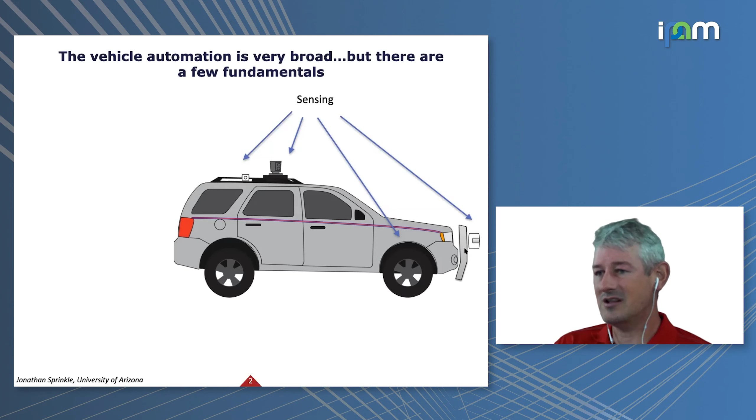In terms of a second kind of fundamental, we are talking about control in this talk, and there are lots of different things to consider when it comes to control. First is that you do have to ingest some of the sensor information. But the second is that control happens at many different layers. You might be controlling from the sense of giving high-level direction to a car for where it should go. You might be injecting a trajectory you'd like to follow. You might be giving advice on what the speed limit is. Or you might actually be sending voltage to a regulator somewhere on a vehicle. We handle that through layers of abstraction, and we'll talk about some of those layers throughout this talk.

And the third big piece is the communication piece. So we have layers to manage our control. We have layers to manage the sensing and how the sensing data are captured and, in some cases, forwarded on to other pieces of information.

This communication piece is necessary because of the way cars are built now, and also necessary for anyone who wants to do serious research on a car, as apart from building a car to sell. If you want to research a car, you'll want to show up with your laptop and plug it in to test something you tried before. If everything is on one computer with no communication except wires, you're looking at hours or days of delay to take a simulation, port it to the car's operating system, make sure you don't violate runtime or real-time guarantees, test it on the car, and then realize you had a negative sign error, so you need to go back and do it all again.

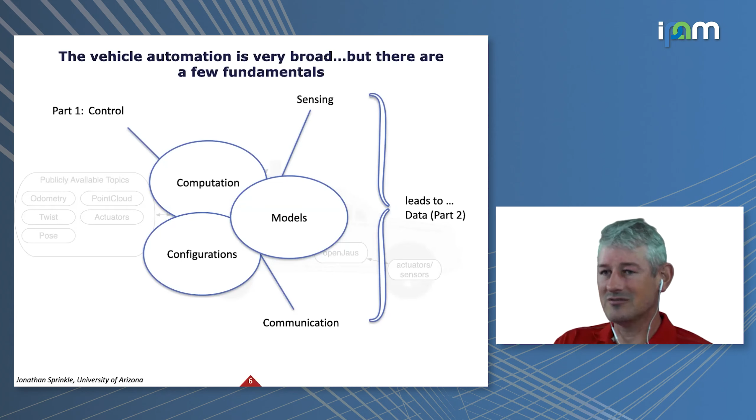What I'm hoping is that after we get through part one and part two, you'll have a sense of, if I want to do something, this is how I go about doing it. This should feed into interesting discussions in our office hours, as well as tutorial sessions in between tutorials and workshops where we can get some meaningful things done as a group.

As I mentioned before, it's kind of impossible to cover all vehicles out there. I'm going to primarily use the research test bed we've developed at the University of Arizona as an exemplar for what you might see.

I want to re-echo that the test bed we've built isn't indicative of anybody else's architecture or test beds, except for the fact that we still get data from the environment and still send messages to control our vehicle. Once you've got those two pieces down, you'll see why some of the architectures we have can be modified to work with other kinds of vehicles.

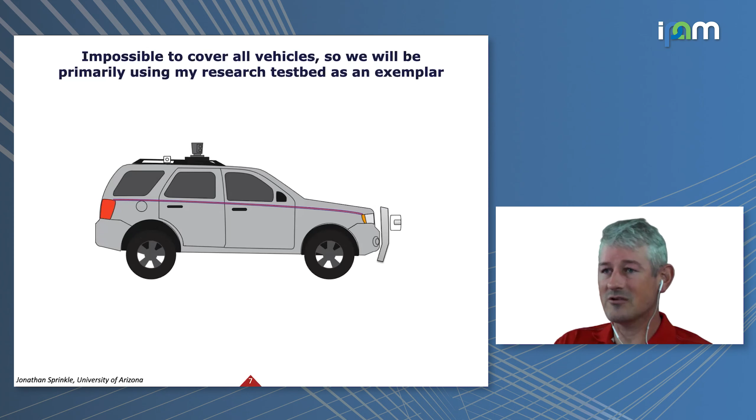As we go throughout the fall program, the test bed that we've developed here is an open source test bed, meaning you can download almost any program that we've run on it and run it on your own machine if you're willing to install some things on Linux and perhaps install your own Linux virtual machine. I think we're going to have some set aside groups for people who want to try some of the tests of stuff that we're going to do.

In the original plan, before the catastrophic events of the last 6 to 7 months, we had a plan to actually have the vehicle there in between pieces of the program so that people could do meaningful experiments or analyze data of specific things they wanted to see, or try out new kinds of controllers that they devised. We're going to work out some way for those who are interested to still do that. It would just be that me and my team will be Skyping with you while we do it in order to make it work.

But the important aspect of this is that you can test and validate stuff on your own machine and then show us the results of that, and have that outcome be something that we can then just download your code and run it on the car.

This has been a successful model that our team has used for about the last 7 years or so with summer undergraduate researchers, where in less than 10 weeks they've come up with something useful that they would like to do with the car, even at like a sophomore and junior level. It's a much smaller time scale if you're already familiar with things like MATLAB and control.

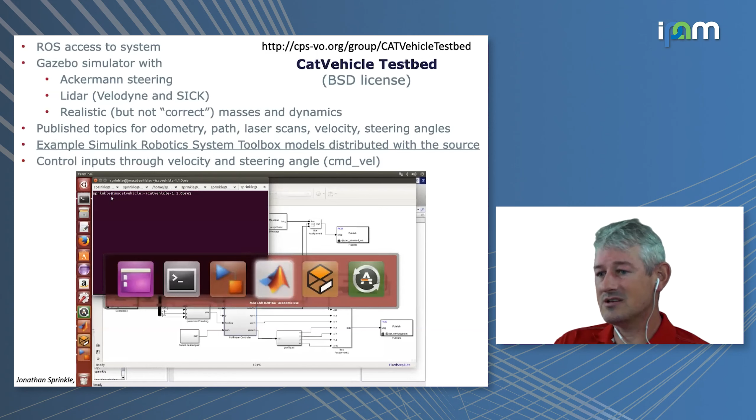The real advantage to doing this is that you don't have to be a coder expert in C or C++, which is the only language that we permit to run control commands on the car. But once you're able to develop something that is successful in MATLAB, you can take that MATLAB model and do something like this to have the car drive around.

We do have some safety things built into the car to try to prevent collision. In this case, you can see that an onboard system detected that there may be somebody living inside this structure, and probably we should stop driving before we collide with it.

If I really wanted to, I could wait a little bit longer in this video, and you would see that you could clearly resolve the situation just by picking up your car and moving it, except that you would then find the same obstacles. So what would you do if you were playing with this in your sandbox and you were a child? Clearly, you would just pick up the house and move it. Then once you've picked up the house, the car is going to be able to continue driving as long as there's nothing else in its way.

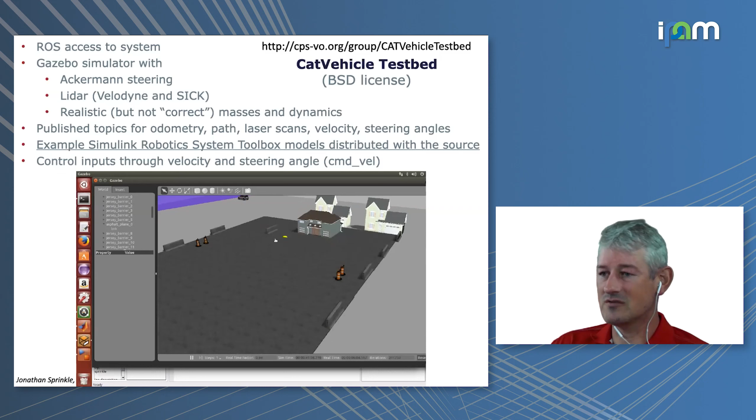So the goal of this is to talk about some of the challenges in actuation, which really involves safety and keeping in mind the safety of your system as you drive it along and do stuff with it. If you just go out and fiddle with it like you would a robot, you could do some really bad damage to yourself or to others. Part of what I'll be talking about today is the culture of safety that you have to have when you're testing with autonomous vehicles. That feeds into desires to have other pieces of your system providing some kinds of proof that they seem to be working.

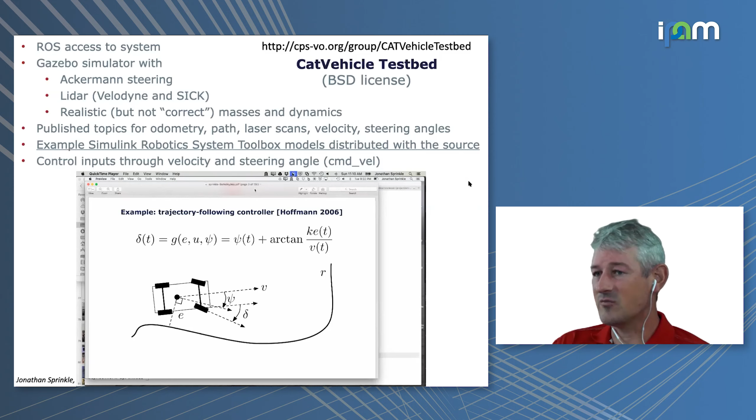The different layers that we have built in, and these are things you'll hear about more as we go through a tutorial on how you would control any kind of car, really reflect the kinds of data architectures that exist in vehicles today.

If you were to go into your vehicle and start looking under the dash, you would see wires everywhere. Even under your engine, you see wires everywhere coming out of the engine. I don't know any of you who might be gearheads like me. I used to have this car that was a 1970s Mercedes diesel vehicle. So there was one wire in the engine compartment, and that came from the battery to the starter. Everything after that, there was no wires.

There was no onboard vehicle management. There was no knowledge of the current state of the pistons. There was no memory that the valves were knocking because there was something wrong with the richness of the injection. There was no information about whether the water pump was on. There was no knowledge of really how fast each individual tire was going, because there was probably only a sensor on one wheel that ran a little spinner that came up and connected to the back of the dashboard, which made the odometer turn and then made the speedometer turn as well.

But cars today are very different. There's wires everywhere. Probably there's more than 100 electronic control units in a vehicle that you've driven, unless you're like me and you really love old cars.

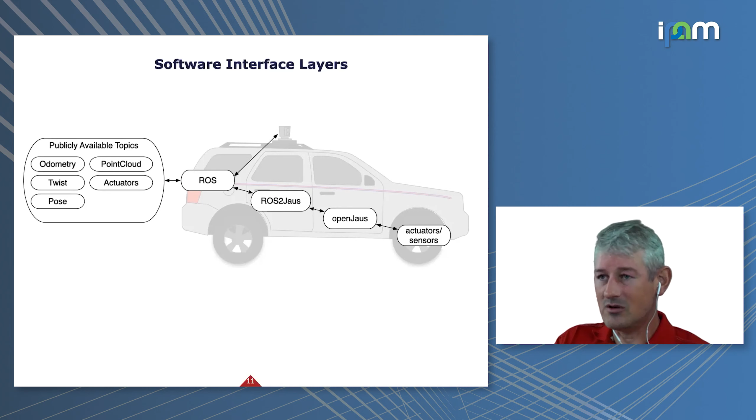Maybe only one or two more things before we start looking at some specific details instead of generalities. As we go through some of the remaining lecture today, you'll see that we do have some ways to visualize in 3 dimensions kind of what the car is doing. This is through a tool called Gazebo.

There's some active research right now determining whether we should allow Gazebo to actually simulate the kinematics and dynamics of our car, or whether we should simulate those in a separate process and just provide updated position information, which is some of the ongoing work of Rahul Bhadani, who's one of the long program participants as well.

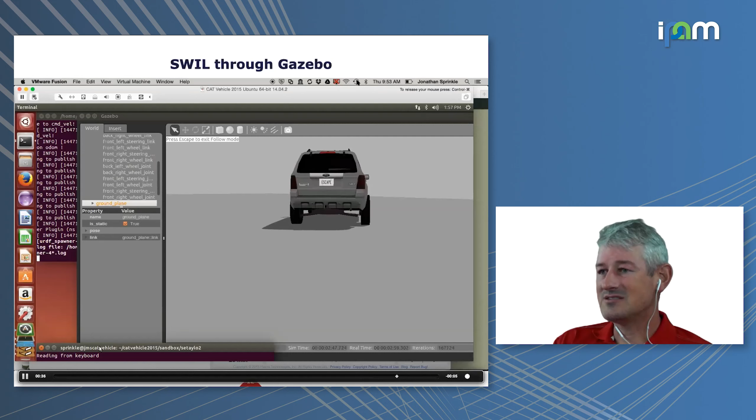So it seems great, right? It seems like this is super easy to do. All you have to do is inject a command and everything will be fine. This gets to why control of cyber physical systems is hard.

Even though we have data coming in, there are delays in that data. The sensing takes time to communicate. There's a fixed rate of communication for almost everything on a car. Instead of being data-driven, where something happens and I send an event, it's almost always time-triggered, meaning I'm sending information at 20 hertz, 5 hertz, or 0.2 hertz about the state of the environment or the vehicle. So you've got a worst case and best case estimate of when you might expect to see anything from any part of the system.

In addition to those sensing delays from the networking, you might also need to filter the data, which causes additional delay in understanding whether something interesting actually happened. Likewise, because we're talking about a physical system, you'll see delays in actuation and dynamics based on fundamental physics. You have to take those into account. I have two examples to remind us how hard that is when it comes to steering, which is one of the most difficult pieces.

So where do we correct these limitations? It comes from the software and algorithms we're using, at the highest level. That's kind of at the MATLAB level, if you want to think of it, where the implementation might be. We still need low-level information from data about the vehicle so we can know how it seems to be behaving and what its physical properties are. But we also want to know how we can correct for those, and that's where we rely on knowledge from control theory and control systems.

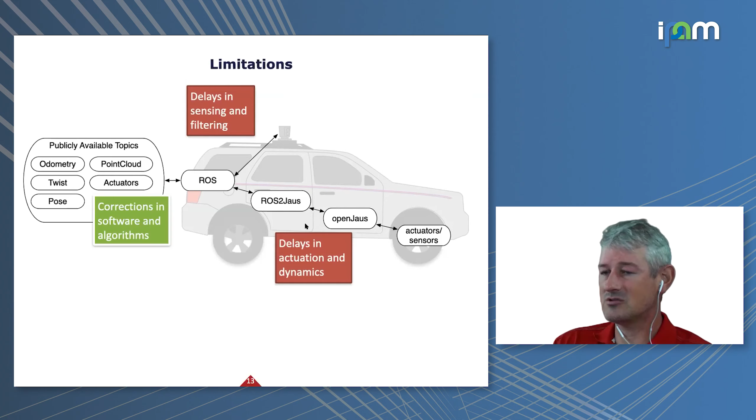So I want to start with a surrogate. Instead of talking about a car now, I want to talk about what's known as the Turtlebot. I'm going to pull up a quick example here, which may work. We were testing earlier to see how these things went.

If you're really good at cybersecurity, you could probably have figured out my password just from listening to my keys click, which is why I switched to a phone so it would be harder to hear the high frequency noise. Okay, so I'm going to type a few things here.

One of them is that I'm going to start up something called ROS Core. I'm killing it now so that I'm running the right one. The second is that I'm going to rosrun turtlesim turtlesim_node. This is going to give me something that is not a car. I don't know if you can see, it's kind of small, but I have a little turtle here.

The next thing I'm going to do is make that turtle move around, using ROS run turtle sim teleoperation key. As I press the right arrow button, I can see the turtle moves. If I press the left arrow button, the turtle moves left. If I push forward, the turtle moves here. I can interrupt as time goes on to make it show something. That's almost a J, right? Okay, so I've spelled the first initial of my name with a turtle. It's kind of hard, having to push buttons and make things happen.

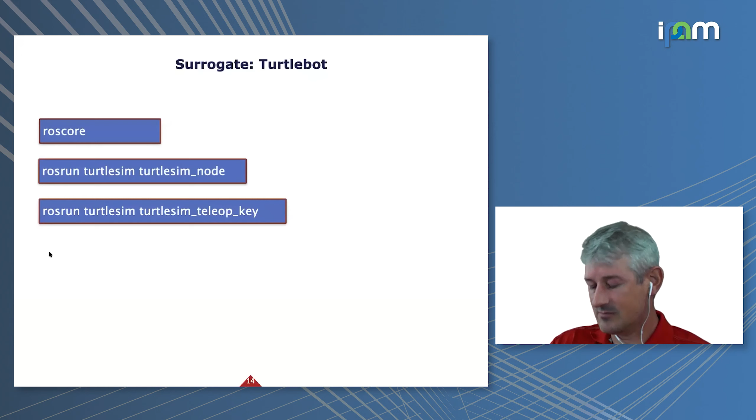Well, it was interesting because if we look at some of those outcomes, and I'm going to skip the next slide since it was the backup in case Unix didn't work. How does the turtle help us with the car? It helps because if we look at exactly what the CAT Vehicle is doing, we've designed it so that we're using the same kinds of messages. So if you can make something work for a turtle, it might work on a vehicle if you don't want to install all the crazy infrastructure.

So going back now to Unix to look again, or to Linux I should say, Ubuntu. Now I'm going to close a couple of these things.

So here I'm going to launch our vehicle, and I've created an environment that the vehicle can operate in, which looks a little bit like a neighborhood. It's very similar to the video example that we saw before.

And as this flies up, you actually don't see anything, because we have the ability to run it without visualizing what's happening. So as expected, something here actually seems to be broken. We'll see—whenever you see red text, it usually means that something not great is happening.

But I'm going to look now at the client that shows us what's actually happening in the 3D environment, and hopefully we'll be able to see that our car pops up.

Some of these red things are red things that pop up every time, and some of them are actually not a big deal.

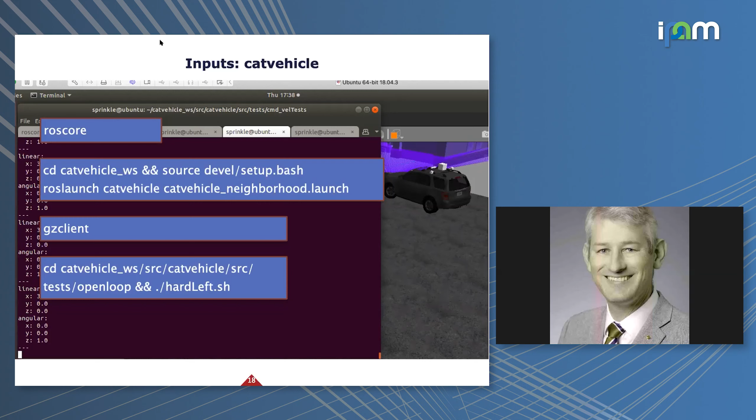So moving on to the next slide, what we're sending to the vehicle breaks down into two kinds of commands. You can send your desired velocity, using meters per second, and you can also send the desired steering angle, given in radians.

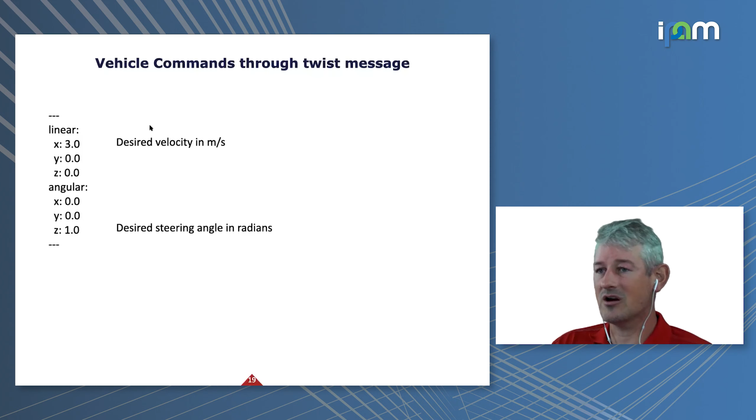These are kind of like the two commandments of vehicle control. There's all the other stuff you can see, like turning your blinkers on, opening or closing the door - all kinds of actuation that are the creature comforts of driving a car. But really it boils down to moving forward and how fast, and turning my tires and how fast. That's really where it all boils down to.

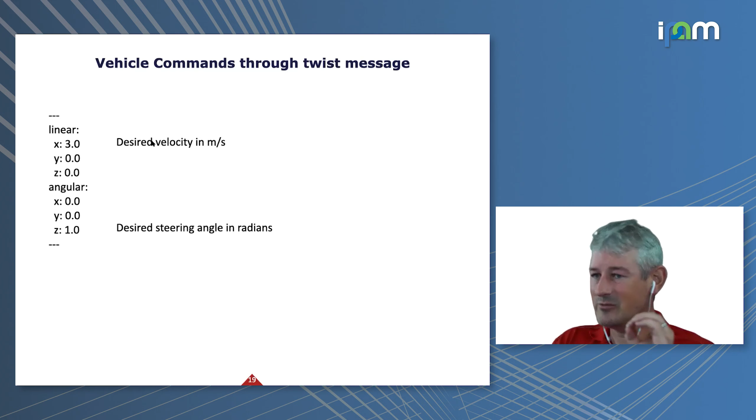And even if you restrict it to just those two things, there can still be challenges. So to address those challenges and other things with safety, almost everything that gets done requires you to do some analysis first to make sure that it's going to be safe.

This is more just for information later. If anybody is interested in developing their own controllers, they can refer back to this slide, which talks about the V architecture we use to first prototype things on paper, then put them into a simulator. If it works in the simulator, port it and run it with software in the loop. If that works, we inject data that have come from the real car. And if that works after injecting from the real car, then we're ready to talk about actually running it on the real vehicle.

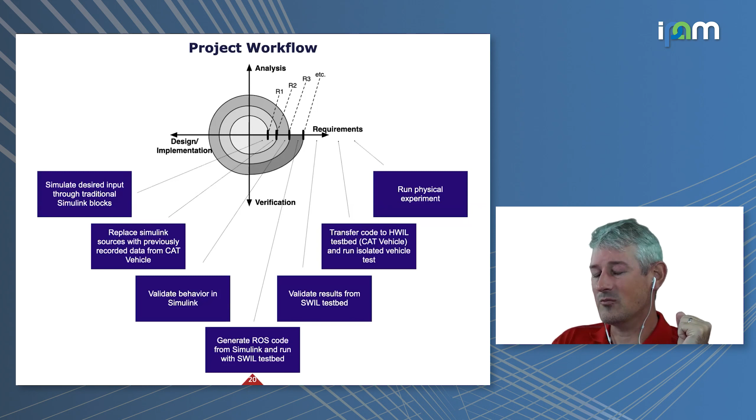So even though there are 7 steps to this, we've had plenty of examples where we've developed a model and run it on the car at high speed in less than, say, 2 hours. So you're talking about being able to take advantage of model-based design in such a way that you can rapidly turn the crank in terms of making changes to a system and affecting those changes.

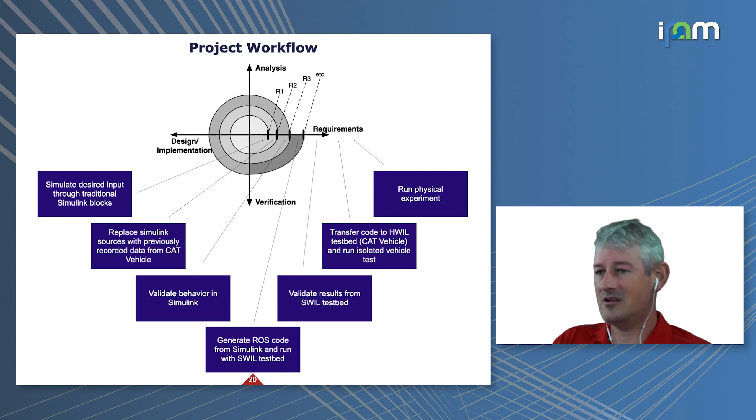So that was kind of a large overview of what some of the challenges can be and what some of the inputs might be. I want to next cover some of the basics of those two pieces of control, which boils down to sending the steering commands and the velocity commands.

Even though there are lots of different flavors of what you might expect for any vehicle, these are the kinds of inputs you may expect on a car you might have access to if you want to send control commands. You might send information about the angle of the accelerator you'd like to see. Those accelerator angles are typically given as a percentage, so you can say I want the accelerator to be 50% depressed instead of an actual angle of 0.2 radians, because you don't know what the max and min of any particular accelerator might be.

You might also want to change the accelerator angle to just be 80% of what it is right now, or reduced by 0.2 of what it is right now. The angle of the brake and the brake change in angle work very similar to the accelerator - you may want to set a specific value, or just increase it by 10%. You can also set a desired velocity and a desired acceleration.

So these two kinds of controllers are supervisory controllers that set the brake angle and accelerator angle on your behalf in order to achieve the desired velocity according to someone else's cost function. Sending the accelerator angle and brake angle are like the lowest level kinds of control - in robotics they're often called the wrench command. So you're actually setting a specific voltage or torque on something in order to make that happen.

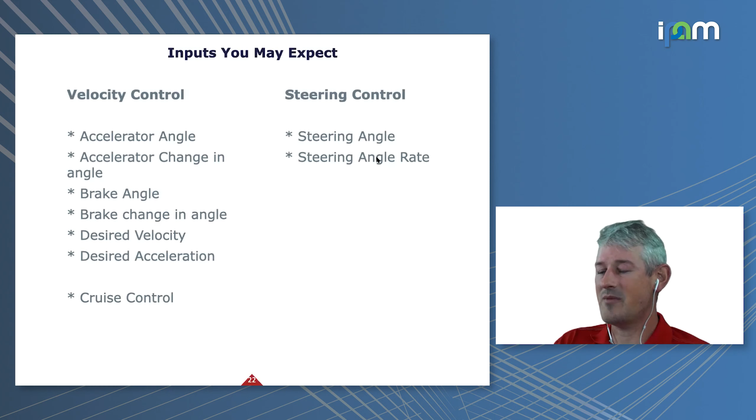Here's an example control layer that's based on some papers that came out of the DARPA Urban Challenge about 12, 13 years ago, where almost all the vehicles that were implemented there had something that looked like this.

On the leftmost side, you had something that was calculating the trajectory that you'd like to follow. In order to follow that trajectory, clearly you had to know something about the localization of your vehicle and where it is, where it needs to go. It comes from the trajectory planner, as well as the state estimation that comes to be approximating what's my current velocity, where am I within the locale that I think I'm in, what are the relative velocities of other vehicles around me, for example. And in between the trajectory planner and localization, you have the steering controller that's deciding that you'd like to turn your steering wheel left or right.

But in this case, the trajectory planner is determining your goal velocity or relative change of velocity and providing that to some vehicle interface. So right away, we've gone from, we don't just have high-level commands and low-level implementation. We've got high-level commands which have intermediate components, and those intermediate components feed into the lowest level control.

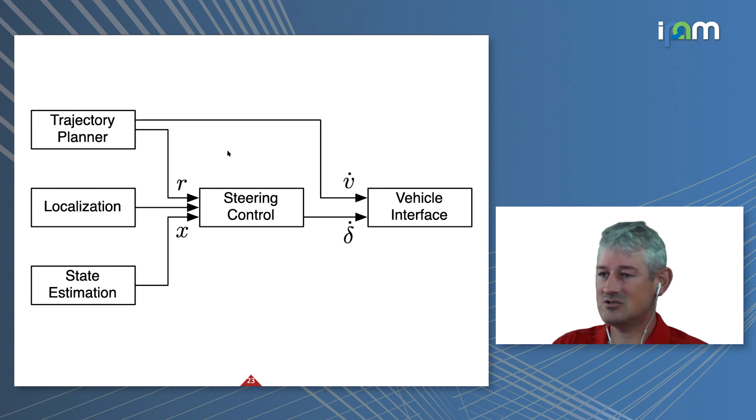This is an architecture that we'll see over and over for control mechanisms, because it allows you to put something in between two other things and intercept messages that are coming from one and pass along your own version of that message in order to affect the control that you'd like to have.

This is very common for other kinds of robotics applications and really derives from component-based design from simulation, where you might see discrete event simulation, DEVs as it's called, where you can simulate things at faster than real time by determining who should receive a message at what time and what that message value will be. And you can kind of sleep until you get a new message. So this is based on some longer term architectures from back in the 80s and 90s as well.

So in terms of steering angle and steering rates, I'm going to go back and see whether my computer ever came to life here in Ubuntu. I don't think it did, but if it did, I would be able to show you another example of these limitations, because if you want to set the steering angle of a particular vehicle, you have to understand that there's dynamics that belong to that.

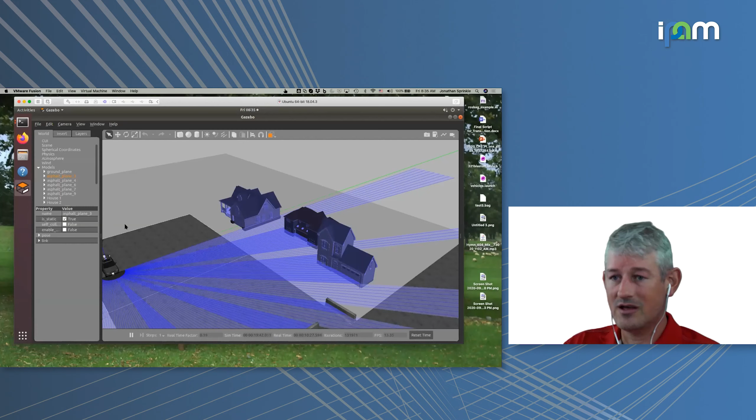Okay, so we did finally get something that came up here. I'm going to scoot over just a little bit, and I'm going to zoom in here so that we can see what's going on.

Jonathan, we do have a question from Lawrence. I'm going to unmute him. Please do, yeah.

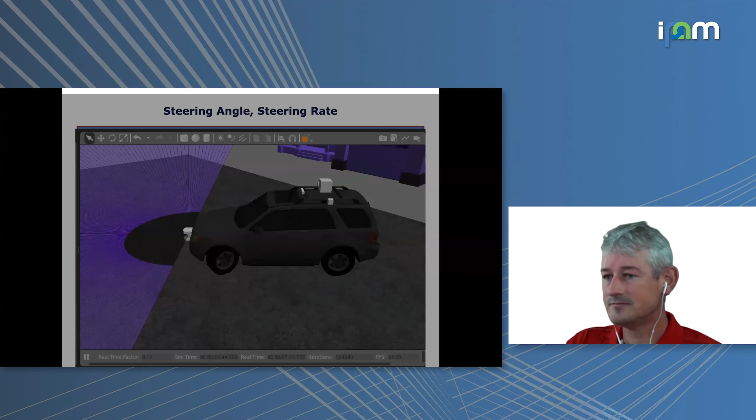I was still looking at the previous slide. I was wondering if you could say a little bit more about the delta variable. Yeah, I'm naming that delta variable as the tire angle. I have actually some kinematic and dynamical equations a little bit later that make that a little more clear — I totally glossed over that. But that's the output of the steering control. So in this case, the steering controller isn't changing your velocity, it's just setting the tire angle that you should follow. It's depending on the trajectory planner to set a valid velocity. All right, thank you, it's a great question.

I hope everybody can see it, but I'm going to zoom in even more until the front tire is totally in the frame here. And I'm going to pop over to pull up an example of what we were doing before.

In this case, we were looking at the command velocity from the turtle. I'm going to use the same commands we were using for teleoperating the turtle. So ROS run, turtle sim, turtle teleop key. But instead of turtle one command vel, I want that mapped to cat vehicle command. And now if I press the left button, we should see the tires move.

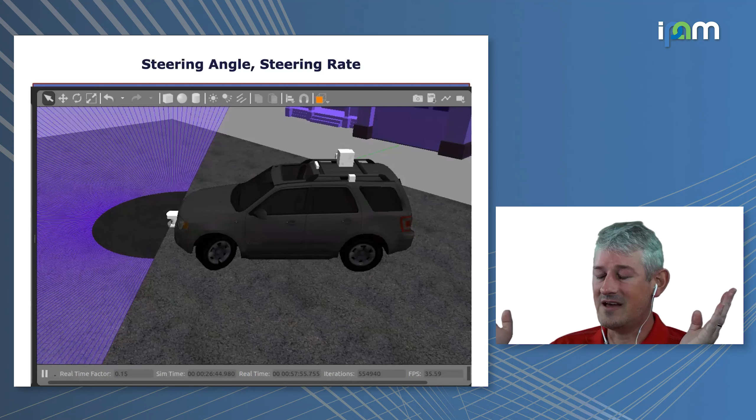But it's something you have to consider as you're doing your controller. You have to understand that if I'm setting a steering angle, it actually takes a little time to get there. And that's something that's often neglected in simulation, especially vehicle simulation.

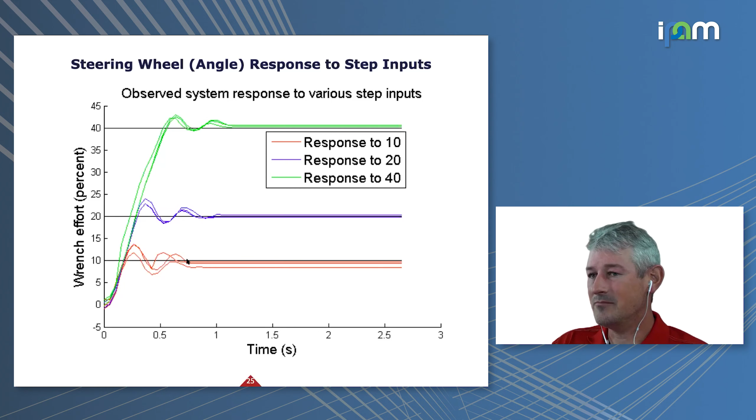Another thing often neglected with dynamically interesting vehicles is that you have to consider the vagaries of the overall topology through something called the Ackermann model. Almost nobody really needs to know about the Ackermann model, I'll be honest with you. To drive a car, you don't need to know it. But if you want to simulate a car, you kind of do.

We're going to try one more time to see whether I can make something interesting work here, and then this may be the last time I try something fancy. The Ackermann model is one where the basics of it were developed, I think, as rack and pinion back in the 1790s or 1820s or something like that. It's actually kind of an old system for why it works.

I'm going to walk you through, and I hope everybody can see this now, some drawings of how this works. It's animated a little bit to show you what some of the challenges are. So if you begin with your vehicle and what your vehicle is doing... oh, I see we have another question here.

Jonathan, we got another question.

Since your sensor is on a different computer and you use ROS to send commands to the car, there's quite a latency between what you observe and when you execute it, even before the wheel starts turning. Doesn't that introduce instability in your control if you want to do obstacle avoidance or something like this with your car?

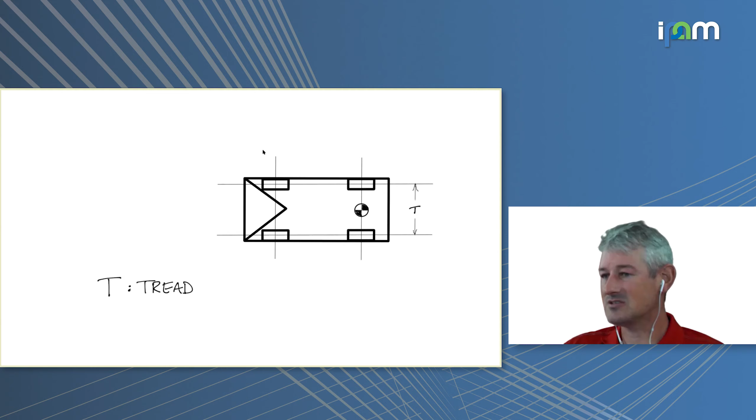So we're going to put some tires on this car, 20 R45 72s or some other number I don't really understand about tires. Each of those tires has its own dynamics and its own path. I have a tread width for my vehicle, and also the wheelbase, L, which controls how far apart the tires are. There's the longitudinal distance L and the lateral distance T that govern the equations of motion for our car.

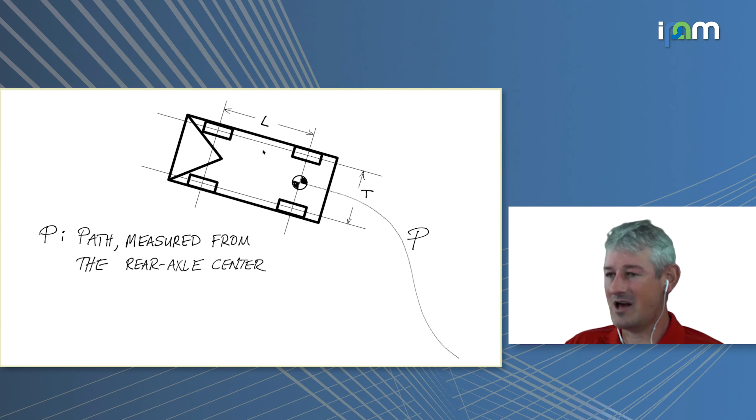If our car looks something like this and we want to follow a path, it's not as easy as just moving left and right, because the car has its own dynamics. We typically measure the path as following over its center of motion, the center of the rear axle. Unless you're doing high-speed driving in top gear, the path of your car is always going to be right over that rear center axle. So we pretend there's an imaginary middle tire governing what the vehicle is doing.

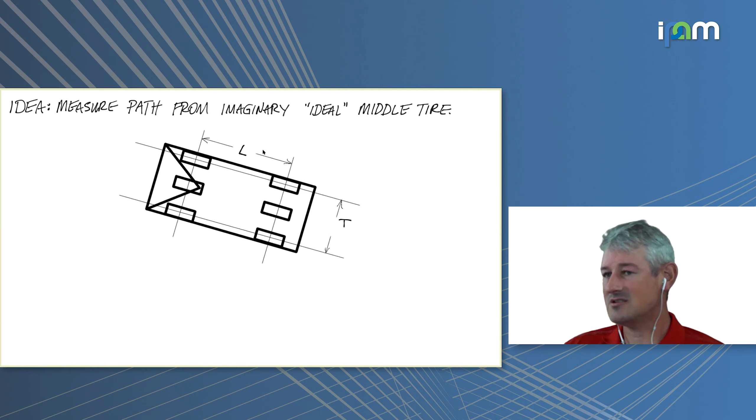This is what's called the bicycle model of control. If you use the bicycle model, you assume you're just setting an idealized tire angle, depending on the dynamics of the car and its physical properties, with the rack and pinion setting the individual tire angles so you don't end up tearing up your car. As we follow this path with this model, it's straightforward when going straight, since all the lines match up for every tire. But as soon as we start to turn, it fails really badly.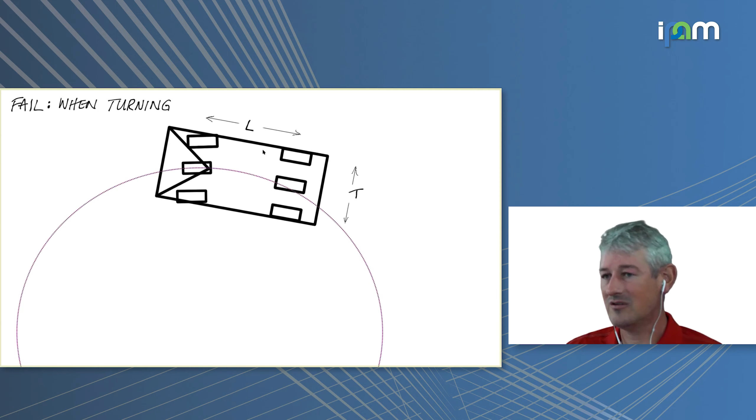If I take each of these angles and draw the circle of the path I'm trying to follow, the tire I'm following, if tangent to that curve, would go here. But if we do that for the inner tire and the outer tire and compare the paths, at some point over here on the left, you see that the tires actually cross over, and they cross over again over here.

So if you wanted to build a simulator, which many folks have tried to do in the past, to simulate what your vehicle is doing, and you forget to take into account some of these kinds of things, your simulator will actually throw your car into a thousand pieces, as long as you have little bits holding the tires together or pieces holding your chassis on.

We did some preliminary tests with the CAT vehicle when we were just using an existing controller that was on a unicycle robot. We just gave it a wheelbase and told it to take off, and one of the tires flew off. I was like, that was weird. Let's try that again, maybe I just didn't make the stiffness hard enough. But no, it just really doesn't work.

You have to choose this ideal tire angle based on the wheelbase and the tread width that you have, so that you can change it, and this is what Ackerman's model does. You have a line that goes through your rear tires, and a line that goes through your idealized front tire. With this, you can come up with an idealized path that your car will follow, which is not exactly the front tire's angle. The front tire will actually follow this path, just outside the lead path. Likewise, the inner tire and the outer tire will follow their own paths as well. Once you use Ackerman's model, it allows all the tires to move on their own and prevents this unnecessary tread wear.

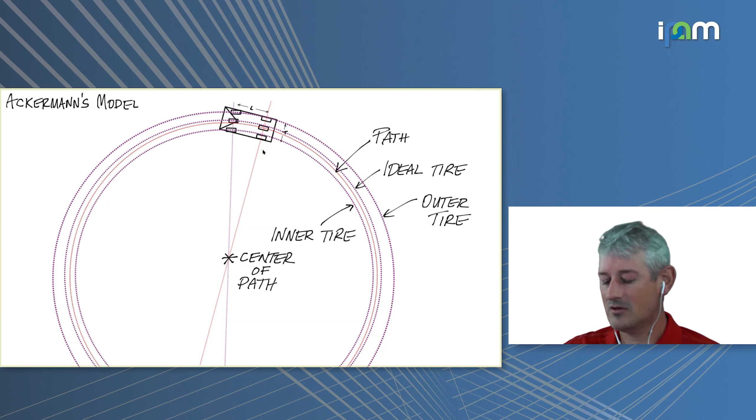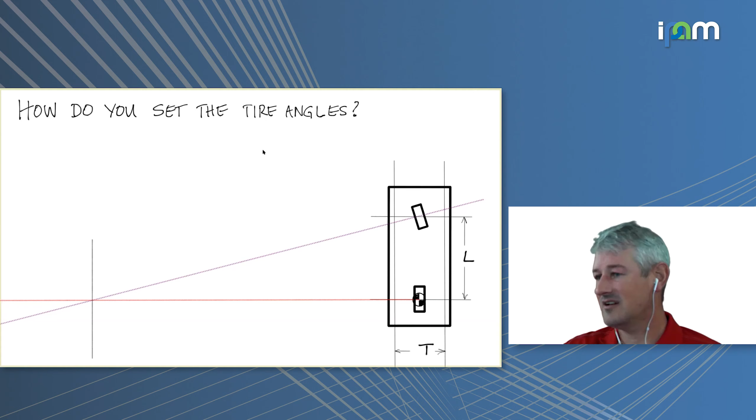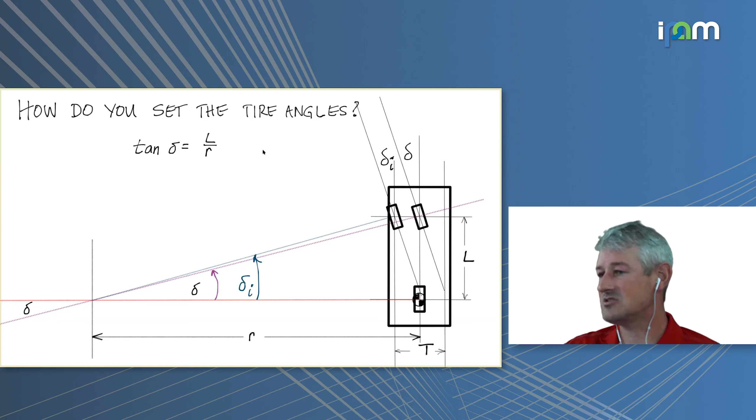So to summarize, what do you see and how do you control with these tire angles? You have a bunch of different equations that can help you get the idealized turning path you'd like. Whenever you want to set a desired path, you're setting your turning angle based on trying to follow that path, based on the radius of your path. So you set an idealized tire angle based on the radius of the path you want to follow, and from that idealized tire angle, you can approximate the tire angles of the other tires just based on trigonometry.

So you have an inner radius and an outer radius that you can ascribe to this. You need those inner and outer radii to make sure you can avoid an obstacle on your inner path and avoid an obstacle on your outer path. So even though this seems like just a simulation detail or construction detail, unless you're considering these things in your validation criteria, it's really tricky to do.

But again, once you've got a radius of curvature, little r, from that radius of curvature you can come up with, based on your wheelbase, the idealized tire angle by just taking the inverse tangent of L over R. That's going to give you the tire angle you should set based on the radius you'd like to achieve.

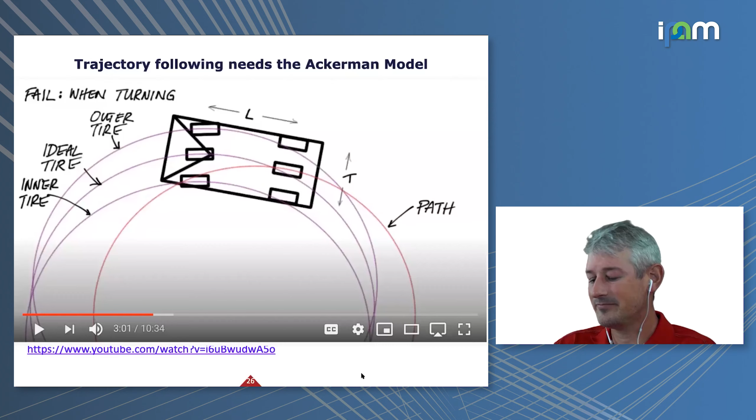And so this was my backup in case that didn't work. We're just going to skip all of this now.

So here's a great example of how to come up with what you want that steering angle to be for something you want to do based on the instantaneous path data. In this case, I'm not determining that I want to follow a particular curvature as much as that for my car, I'm not on the path right now. So I can estimate my error to the path, E here. And with my error to the path, I can also get an instantaneous value of my angle. So my angle at T is with respect to where the path is normal, and my psi is telling me the angle that I have to the instantaneous curvature of the path here. So based on my error, the instantaneous path error, and my current velocity, I'm going to use this equation to determine what I'd like for my tire angle to be.

And maybe there was another question, I thought I saw the chat light up a second there. There is - the question is about, in a modern car, whether the individual tire angles are controllable or is it mechanically enforced to be correct relative to each other?

For some vehicles, it can be mechanically controllable for each individual tire, especially if you've got a four-wheel drive car or a hypercar. Those are ones where the individual wheel speeds can be controlled, and they're often used to reduce tire wear. But largely what happens is that somewhere there's an onboard component doing some lookup table analysis to say, at this speed, with this tire angle, this is how I need to move all the other individual tires. There's an onboard computer doing that, and they kind of don't trust us to do that ourselves. We would probably need to hook in and connect voltages to each of the individual tires to make that happen.

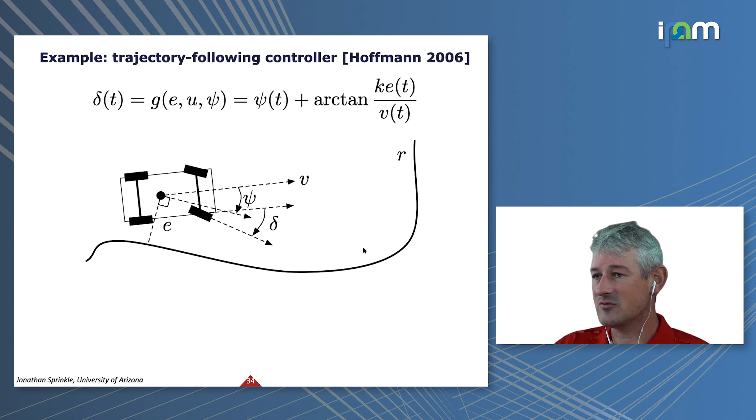But the pesky element here is this velocity of T. I'm depending on somebody to give me a reference velocity that's valid for a specific curvature, which is not always useful. With, I hope, a little bit of forgiveness from anybody on here who may have been part of this team, there are previous examples of what can happen if you give a turning angle and don't think much about what the reference velocity should be. You might end up saying, is my camera upside down or is the car upside down? So you have to be really careful when sending these commands to a vehicle to make sure it behaves like we think it should.

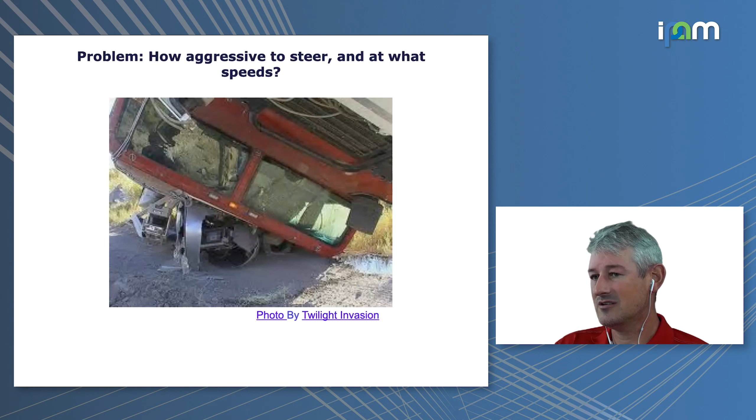So in order to accommodate this, one thing you may consider is coming up with controllers that will fix the velocity. If you provide an input velocity that's either flat out wrong or too aggressive, you'd fit that to a particular driving profile. I'm treading a little close to the data topic we'll talk about more on Monday, but if you had information from a driver about how they typically drive, and you recorded the steering angle percentage compared to the velocity they're driving at, there's actually a pretty well-defined curve that falls off pretty hard as you get to higher speeds. It turns out we almost never have high steering angle at high velocity.

We can develop some controllers, and this isn't necessarily about understanding all the vagaries and mathematics behind it, as much as knowing you can create this controller and put it in the car, and it will handle setting the velocity for you if you provide the wrong velocity. It will regulate your velocity based on the steering angle it can achieve right now, based on your definition for what safe means.

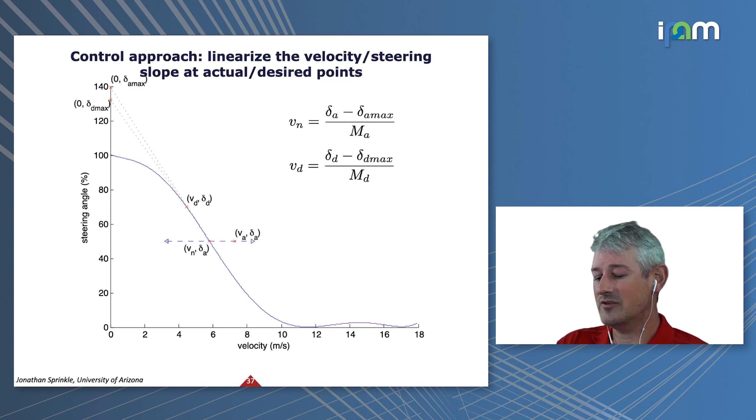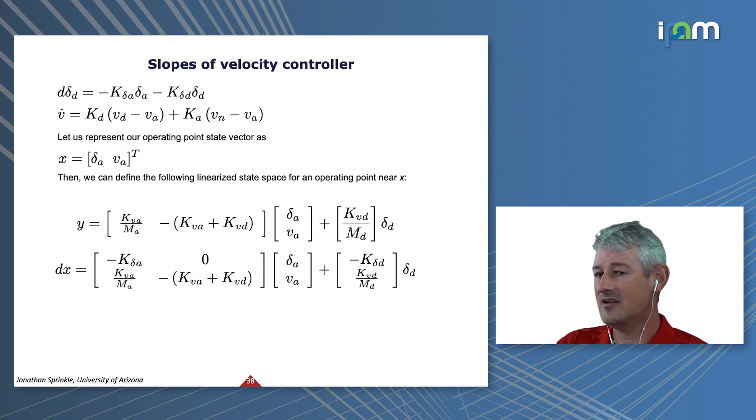Going back to the comments on what it means that we can control individual wheel angles, there are lots of controllers like this that translate instantaneous velocity and desired steering angle into actual steering angle and velocity for individual wheels. So you can do fairly straightforward control here to determine how this velocity controller achieves the actual velocity, so that if we start outside the safe space, we can get back into the safe state space as quickly as possible. This kind of implementation allows us to make that happen.

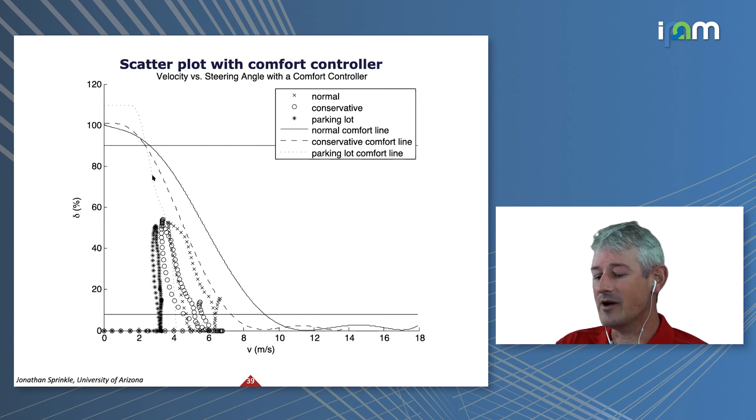We can even define a couple of different driving profiles depending on what we want to follow. Here's a normal comfort line. Here's one that's really comfortable. And this dotted line here is me driving in a parking lot, or you may want to consider it as my grandmother driving around. Every person has kind of their own individual curve that they follow.

So why did I go through that example? You'll remember that in the beginning we talked about having the steering controller that's in between your trajectory planner and the vehicle interface. This adds another layer, which we call the comfort controller or safety controller, however you want to think of it. That safety controller allows you to command exact values for rate of change of steering, but it regulates your velocity, preventing you from sending a velocity that's too high because that would result in catastrophic failure or unsafe behavior.

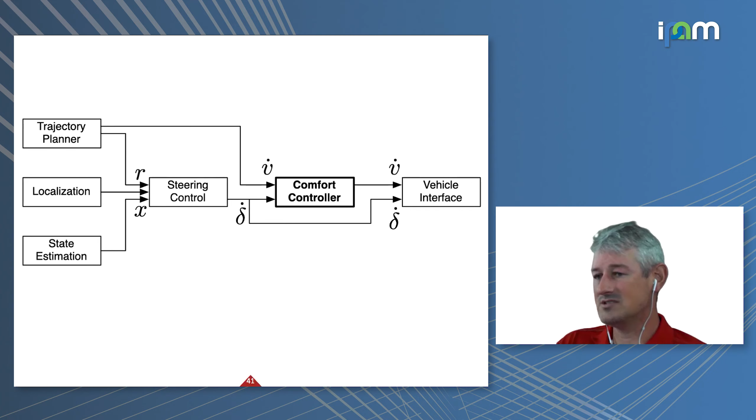This is indicative of the kinds of control architectures you see, and why we depend so much on things like the Robot Operating System to do this, because we can hook the boxes up in a certain order and have individual components tested on input and output data streams so we can validate they're working. This is essentially the state of the art for producing low-level behaviors on existing vehicles today: individual components are spec'd, their input-output definitions given, and once they pass validation and requirements testing from whoever purchased them—if it's Toyota, they might purchase from Denso; if it's Dodge, they may purchase from Mopar or another supplier developing those low-level controllers—once it passes that, they feel comfortable plugging it into their car and making it work.

I want to spend a few minutes talking about some of the actual limitations we have in vehicle control. These are largely based on physics, but also get into some challenges—one of the questions, I think Darius mentioned, about the delay you might see just from being hooked up in a network. Our vehicle came with a stock cruise controller that was a predictive receding horizon controller that would try to match input velocities as they came in.

You could provide a series of velocities you'd like to follow over the next, say, 10 seconds, and it provided an optimal controller that would try to match those velocities as best it could. So if you know your velocity for the next 10 seconds, it's a great controller. For a cruise control example, we start at time 0. At around time 6, we provide a reference velocity that goes up, and then we stay at that velocity of about 8 meters per second.

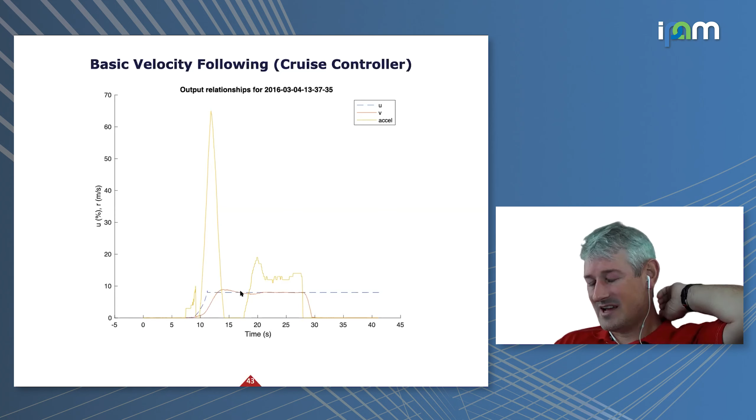As we start to drive, you see we track that velocity, and at around 12, 13, 16 seconds, we get to steady state. So 16 seconds to get to 8 meters per second is not particularly aggressive—you would probably be asking why we were going so slow, or if we were still in the drive-through if somebody was driving that slowly. But let's just say, for example, that's kind of what we've got right now. That's our cruise controller input.

So you provide a reference velocity, and the vehicle provides accelerator and brake angles in order to make that happen.

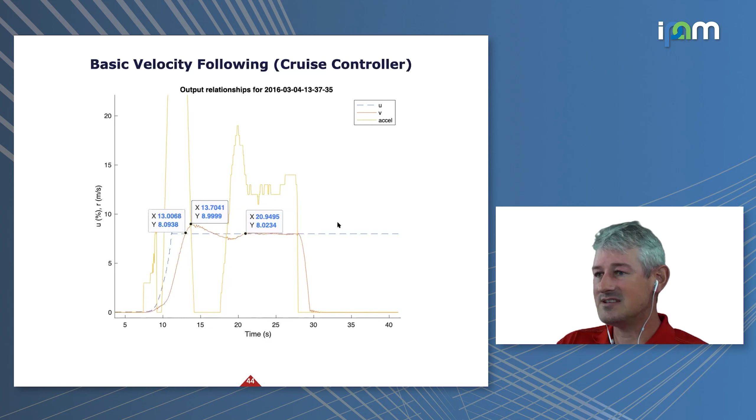Now if you zoom in on this, you can see the steady state value was around 20 seconds. I only thought it was steady state at 16 seconds, but we actually dipped down below there. Once you get into steady state, it maintains pretty well. But if you provide any input other than a constant reference, you can end up with behavior that's not as good as you thought.

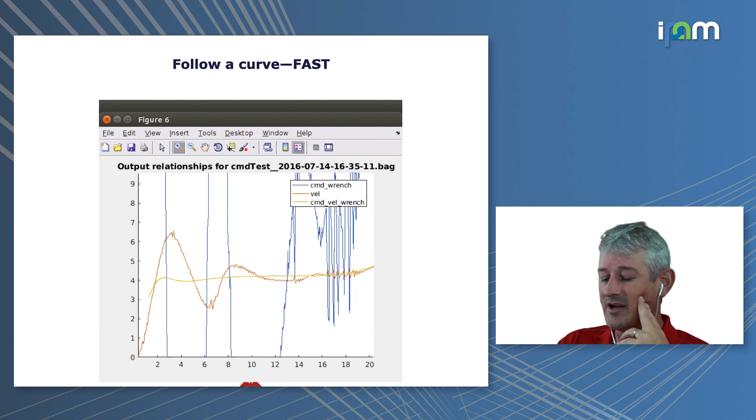If you wanted to do something like hypothetically control traffic flow, something interesting like dampening traffic flow with your car, and you were to use this, you'd be coming to a stop in the middle of the lane. So it's really kind of unacceptable.

This was not a great outcome, right? We needed to correct this. Jonathan, so this gets back now - we have another question. Pardon me? Oh yeah, go ahead.

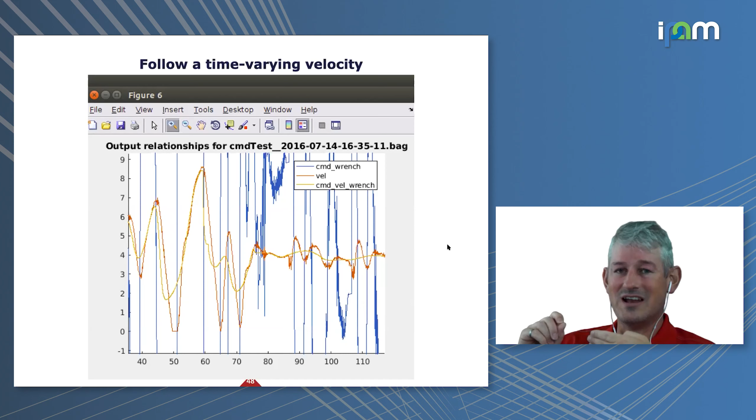And many of the more interesting controllers are ones where we're reacting to the vehicle ahead of us, and the vehicle dynamics ahead of us dictate how we need to react. Okay, I see. Thank you.

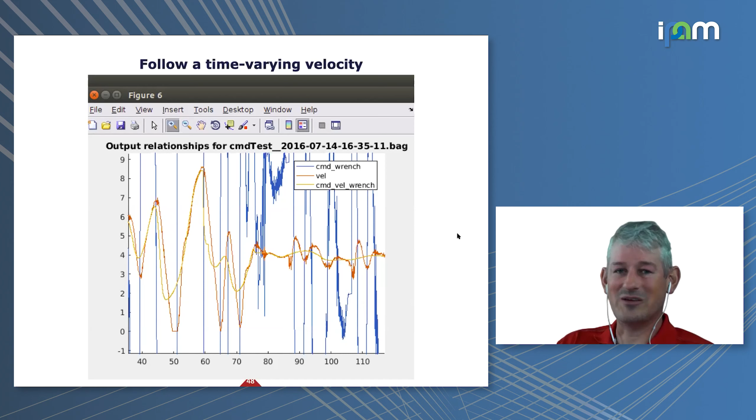But it took us a long time to figure this out too, because we thought, it's a predictive controller, how bad can a predictive controller be? Well, it turns out if you change your input a lot, predictive controllers are pretty terrible. And again, it's not that they're bad, they're just not designed to do that, so we shouldn't fault them for that.

Going back to the software interface layers we talked about earlier, because we're using lots of different layers to make this happen, we can inject new kinds of control at different places so we can take advantage of developing a little bit of new technology in order to make this happen, and just put it in at the right place. So with apologies to those of you who have Clippy as your favorite, that's what we're trying to do.

We're trying to build a model and analyze that model. Once we're happy with the analysis, we want to generate the code and then have it work.

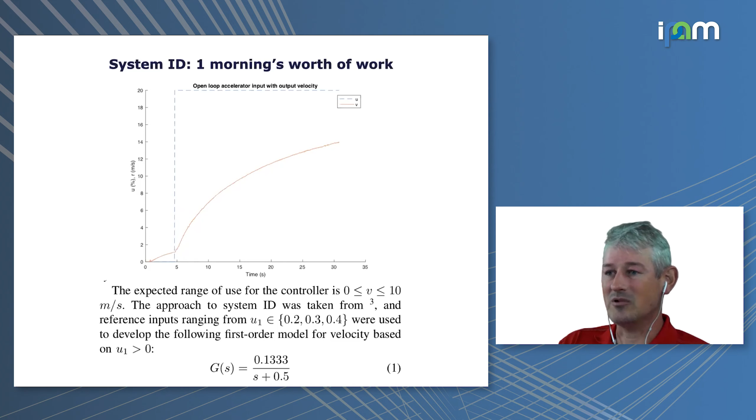I may be able to talk a little more about this on the data access side. We're treading into data territory again. But this is an example of where if you take a system and do a little bit of system ID, then you can build a model with that system ID within a tool suite.

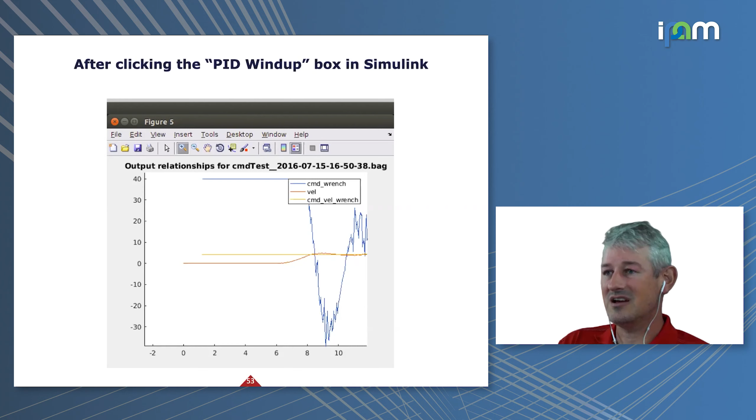Once you're happy with how your system behaves there, you can take the inputs you got from the real system and see how it tracks. So now we can actually simulate that using our Gazebo simulation to make sure we're not going to send some commands that are weird. In this case, we actually track pretty well with what we're expecting.

And then we go out and track it with just a cruise controller. We see that it's behaving pretty well with the cruise pole at 3 meters a second. Now when we try to follow this representative curve, you can see that we're actually tracking it much better. We're still overshooting a little bit, undershooting you might think here when braking.

That's a safety design decision. We're braking a little more than we thought we needed to because we're better off braking a little more than accelerating a little more. But we're no longer coming to a stop when we get to this curve. We're dropping down to, say, 1.5 meters per second.

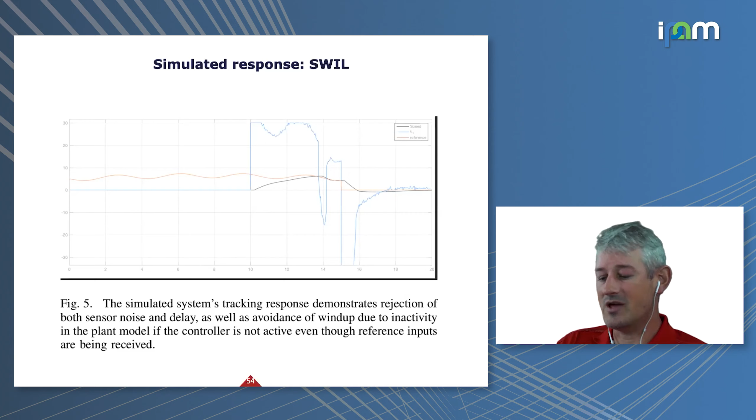This is a zoom up of that. We're dropping down to a little bit lower than we want, but we're not actually resulting in coming to a stop. So these kinds of low-speed tests work really well because we did a lot of linearization to make that happen. At high speed, the models we need to work with are much higher risk, so we have to be a little bit better with thinking about this.

We're a little short on time, so I'll skip the Socratic method here. But if we want to update a velocity in a lead vehicle, we're going to be doing up to, say, 22, 23 meters per second, which is about 50 miles per hour.

One thing I do not want you to ever consider doing is having somebody sitting there with a terminal, typing 22.2 and pressing enter. Because if they accidentally press 2.2, your vehicle will follow 2.2 exactly since you gave it that command. And any vehicles following you will pretty soon be in your backseat.

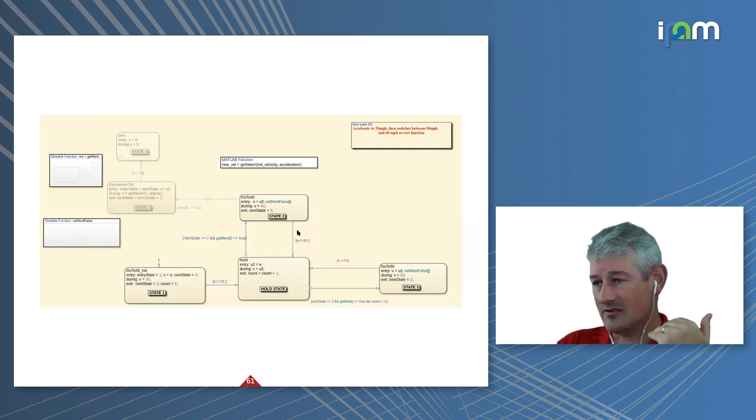We have a different version of that here, which we tested with hardware in the loop at high speed, where we got to a reference velocity, increased our velocity, decreased it, increased it, decreased it, so that we could validate that the system seemed to be behaving well.

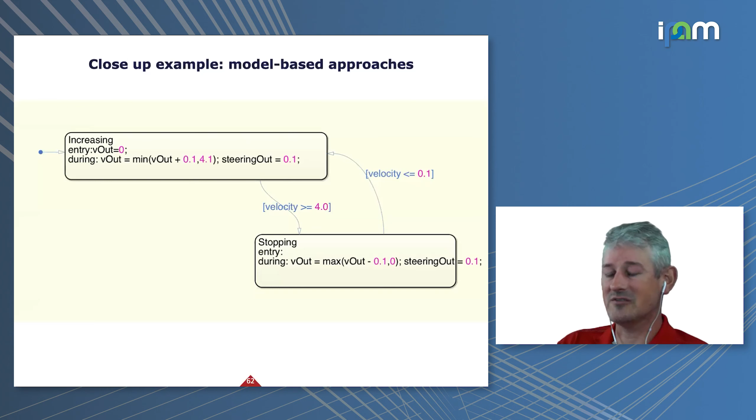In this case, with the configuration management you have, we're actually using the existing cruise controller because it's designed to hold a specific velocity. So you can choose at any given time: do I need to track a predictable velocity, or do I need to track an unpredictable velocity? You're kind of switching back and forth between which controller you'd like to use, and that's useful to think about as you're doing this kind of work.

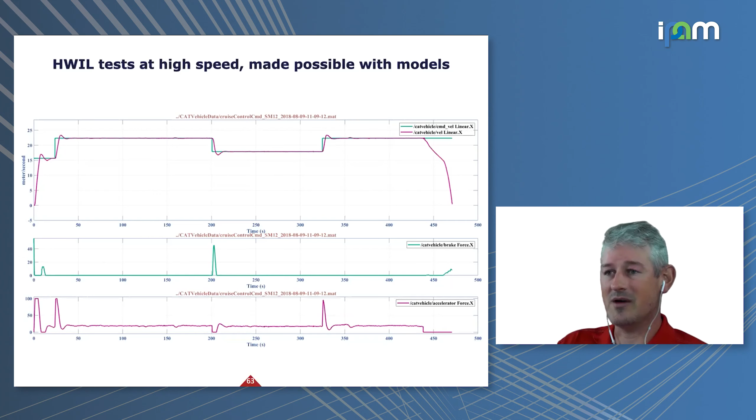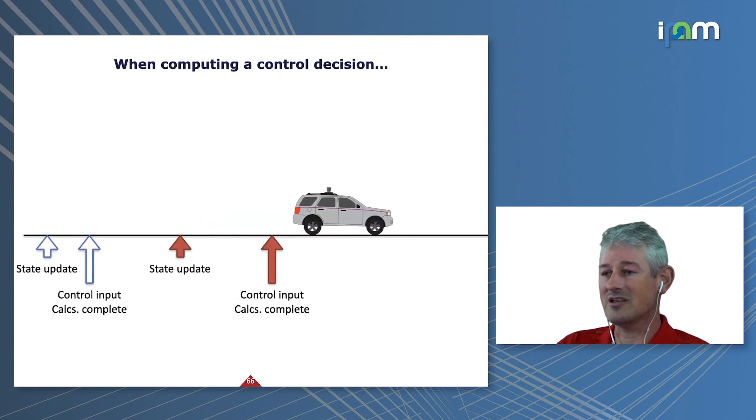I think the last thing, which prompted the question from Darius before: if you're moving along while computing a control decision—and this is true even for systems not in ROS—you might get a state update and not finish your control calculations before the next state update, which results in missing that deadline. In this particular case, the control calculation misses the deadline by some margin.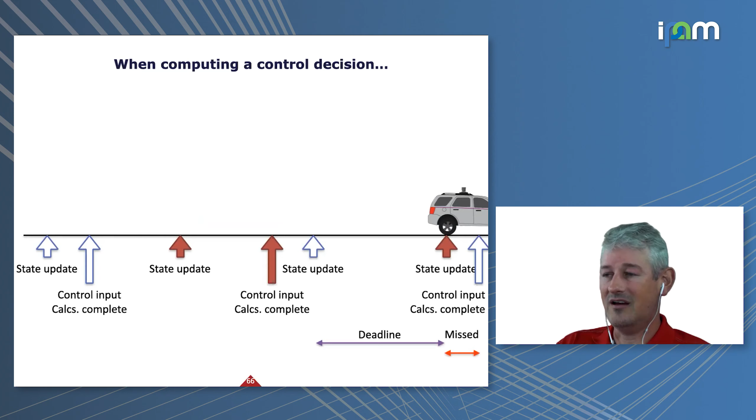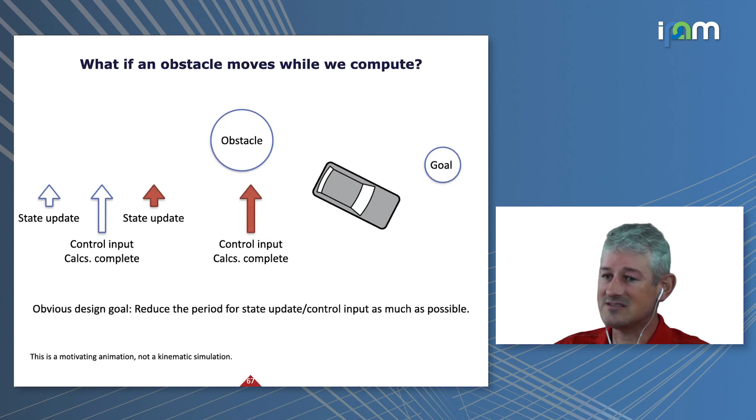This is really common in optimization-based controllers. Especially if the obstacle is moving and we miss our state update—I think this is exactly what Darius was saying—here, this is an epic disaster. I was trying to move, I saw the obstacle moving, I was trying to move, but I couldn't finish my control commands fast enough, or there was latency in the network that caused it.

So predictive control is one way people have tried to account for this: if you can have a fast loop and predict what your obstacle is doing, then you can provide reference inputs that let you also predict that obstacle's motion and move around it.

But there are some... May have had a follow-up question for you. Oh, yeah, go ahead. Yes.

One question: from your architecture, I understand the sensors are connected to your computer and you allow others to connect on a different machine. The problem is, if you try to move the sensor data over a slow network, you increase the delay to be evaluated. You have to move the data between the computer that acquired it and the computer that's analyzing it, and this is additional delay you introduce to the system.

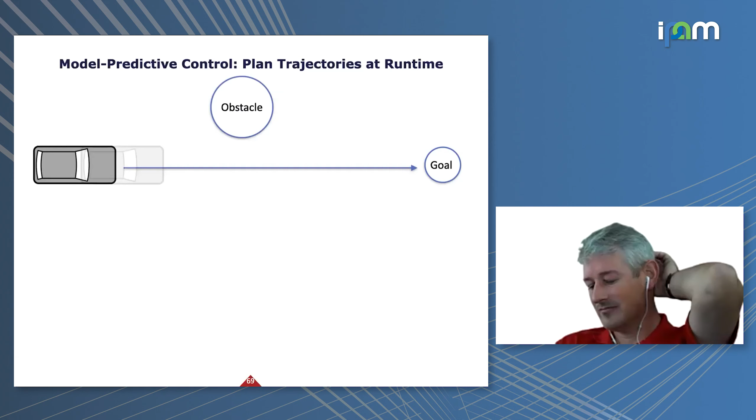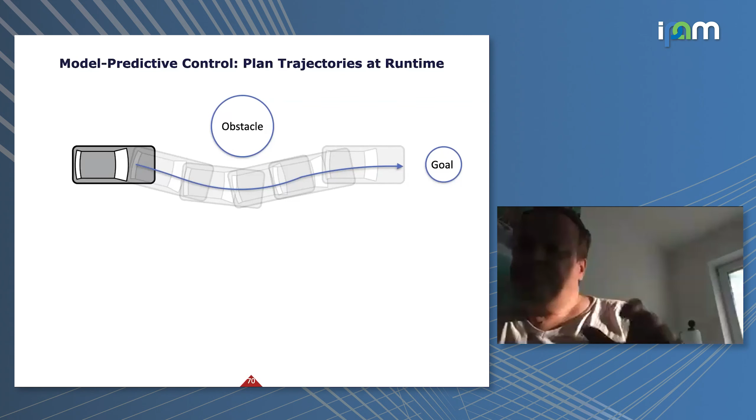Yeah, it's very true. The way we've typically done it is that if something needs access to a tremendous amount of data being acquired right then, you can place that component on the computer acquiring those data, so you don't have to ship it to more than one computer on the network. That's one way to mitigate it—the controller may run on your machine and the inputs you're getting are a filtered version of what came from the real data. Yeah, okay, and because you can deploy which thing should go on which machine, that's what makes that possible. Mm-hmm, okay, thank you. Yeah.

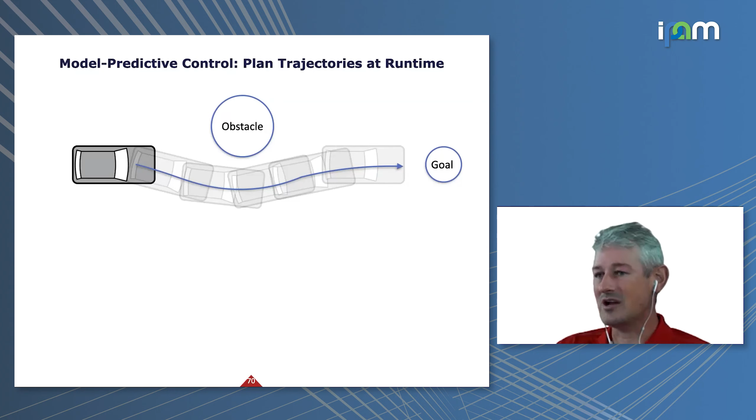So again, if we're trying to avoid an obstacle and we have a really narrow or small margin for error, you may think that to account for that small margin of error, and to be able to get really close to those obstacles, by cracky, I need a really accurate model.

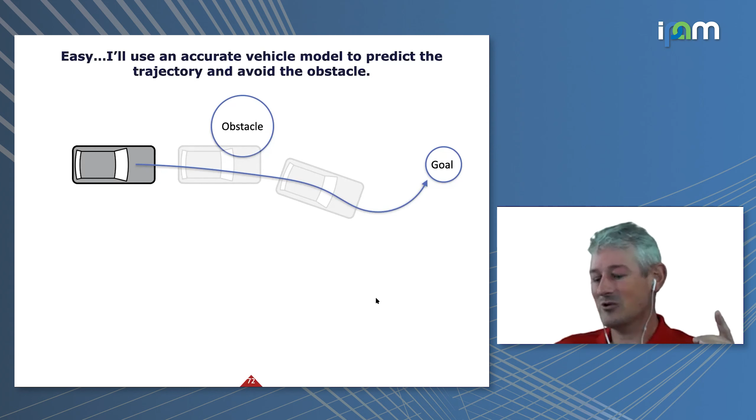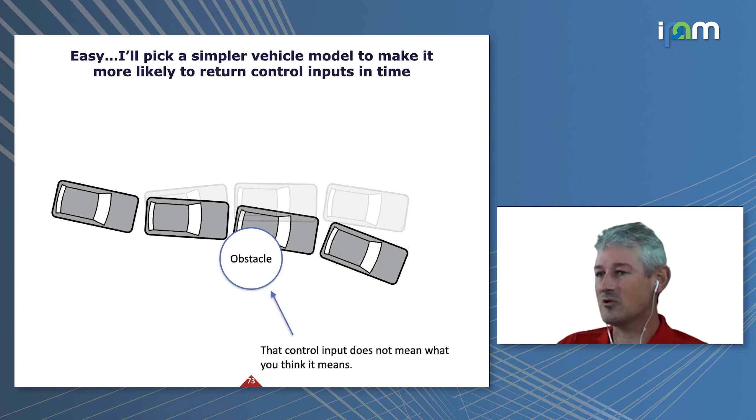But the problem with a really accurate model is that it's going to increase your feedback time. It's going to increase the amount of time that it takes for your optimizer to finish, which is going to reduce the frequency of your controller. This is something there's active research on by lots of different folks called computationally aware control, where you're switching back and forth between your predictive model based on what your expected margin of error is. That allows you to do that. So essentially these competing constraints are something that you should be concerned about as you're developing a controller.

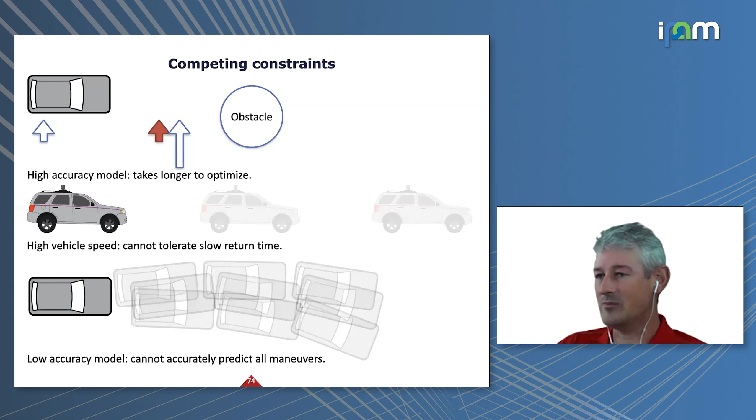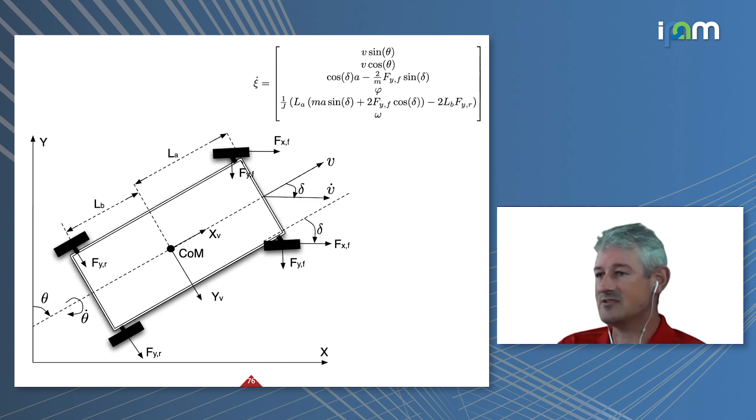The bottom example takes into account the tire stiffness. It takes into account some moments of inertia. It takes into account all kinds of other things. And it's much more accurate, but it's also much more prone to modeling error and results in many different things that might be happening. So for the sake of further discussion, or if people have questions in office hours, we can talk more about what some of those dynamics are.

I want to wrap up in just a couple of minutes, but I thought I would also include, for the sake of completeness, that everything that model predictive control might do is based on producing a sequence of control inputs based on a sequence of expected state outputs. So you do have some typical receding horizon, and you're supposed to be providing the input sequence at your expected rate based on optimization of some cost function.

I've not included much detail about the cost function here, except that I do have some state constraints that I want to make sure I avoid, maybe obeying the speed limit. It might be avoiding an obstacle. It could be trying to reduce the frequency at which I turn my steering wheel, so that if I integrate the steering wheel change over time, it's the slowest amount possible. Or it might also be that I'm including information about my final destination and where I want to go. So not only do I want to move smoothly and avoid obstacles, but I eventually want to get to the place where I'm trying to get to.

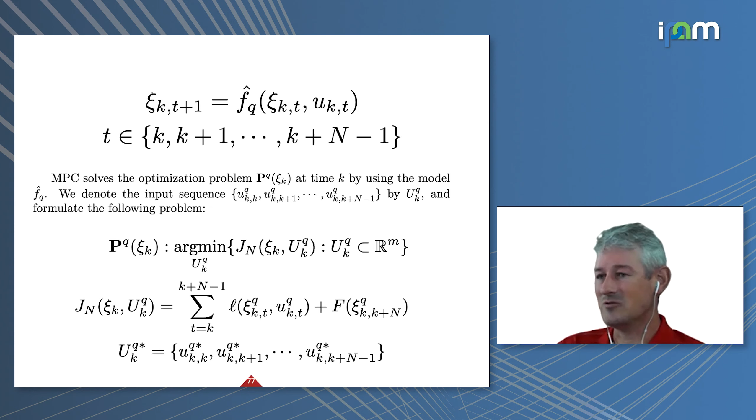So considering this cost function and taking the minimum across this based on the only thing you can change, which is your control input, and keeping in mind that your control input is a product of the state equation that we see up above, this is what makes receding horizon control and MPC so complicated, because you've got a lot of computation going on and you still need to send control inputs at any time. So it can still be really useful when looking for these optimal, or optimal-ish, good enough conditions.

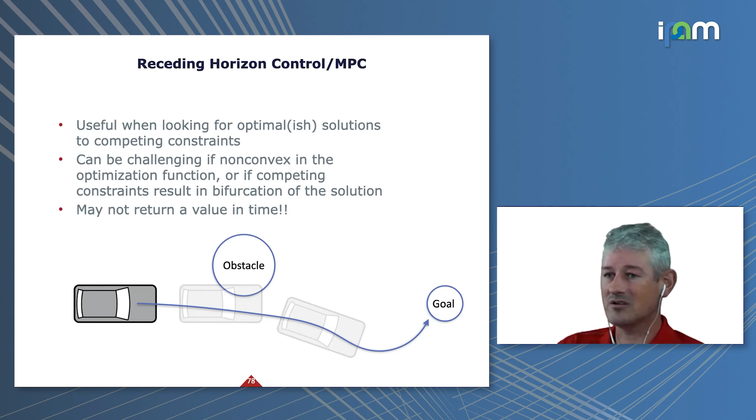But if your optimization is non-convex, or if you have competing constraints, you could end up avoiding one obstacle but hitting another one. So that's not good either.

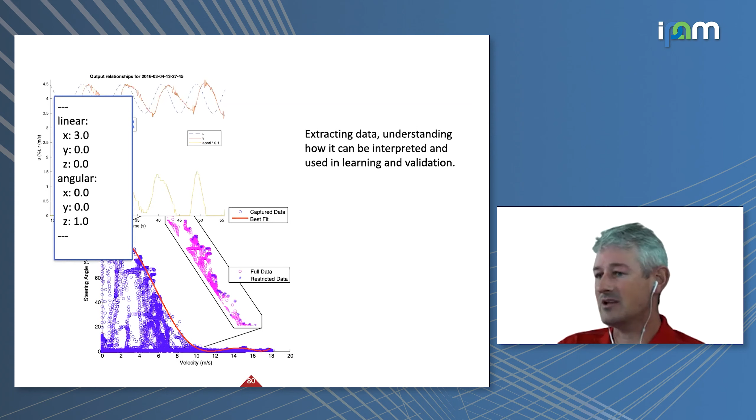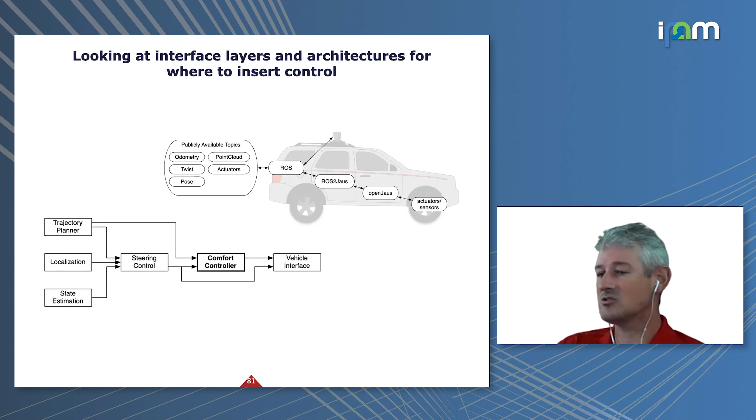So coming up Monday, we talked a lot about the control side today. On Monday, we're really going to lead into more aspects of how do we extract data from a vehicle? What do we do with those data? How do we interpret the data? And how might we consider using it in learning or in validation? We're going to look a little bit more at some of those interface layers, at architectures for where you can insert your controller. And we're going to also explore more about how do we extract models that we might be using to build new kinds of abstractions that would lead to new kinds of properties.